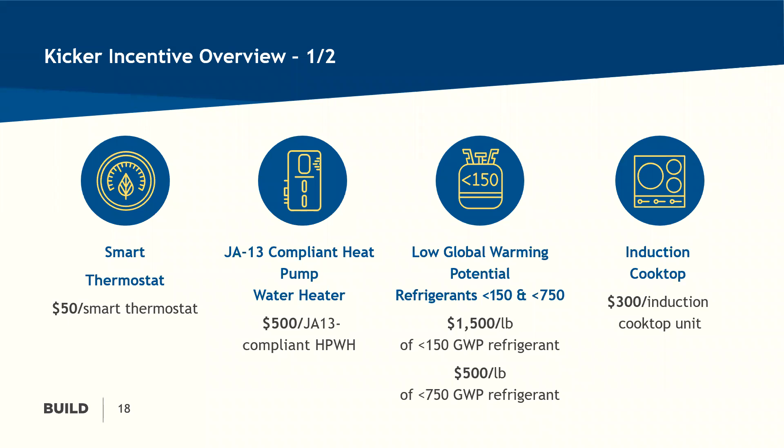Now let's get into why you're all here today, the individual kicker incentives.

Our first kicker incentive is the smart thermostat, which allows residents to control their heating and cooling from their phones, tablets, or other smart devices through Wi-Fi. Smart thermostats help residents save money on their bills and reduce their carbon footprint.

Each additional smart thermostat installed is worth $50 in incentives. If your project installs 100 smart thermostats, that's an extra $5,000. With smart thermostats costing around $125 per unit, that gives you a 40% material cost savings on smart thermostats for the project. There are several benefits to consider when choosing smart thermostats.

Smart thermostats are easy to install. They can be remotely controlled. They can help residents reduce carbon emissions. They can track your energy use, and they connect to all smart devices. Plus, they contribute to grid flexibility.

We require that smart thermostat products be listed on the Energy Star website in order to be eligible for incentives. You can access the directory for more information on the Energy Star website.

All kickers must have documentation proving the equipment was installed in accordance with BUILD requirements. This could include product invoices, the make and model of the equipment installed, and more. We'll review this information at the end of this section.

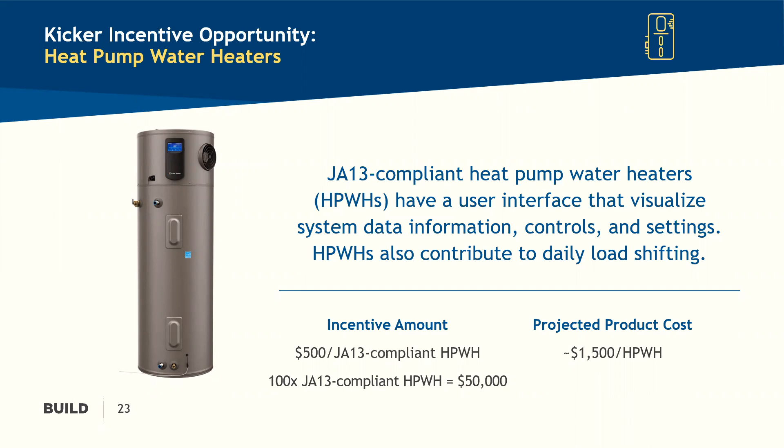Each heat pump water heater installed earns $500 in additional incentives. If your project is installing 100 heat pump water heaters, that's an additional $50,000. With heat pump water heaters ranging around $1,500 per unit, that gives you a 33% savings on heat pump water heaters for the project. How does this benefit you? Let's take a look.

The benefits of heat pump water heaters include reducing carbon emissions, increasing the energy efficiency of the building, and increasing the energy cost savings of the project. They are easy to use and they contribute to grid flexibility during high demand or when power delivery is uncertain.

In order to receive the kicker incentive, the heat pump water heater must be listed as JA13 compliant and meet the qualification requirements. Additionally, all heat pump water heaters coming through the program, including JA13 compliant heat pump water heaters, need to be NEEA Tier 3 or higher to be eligible.

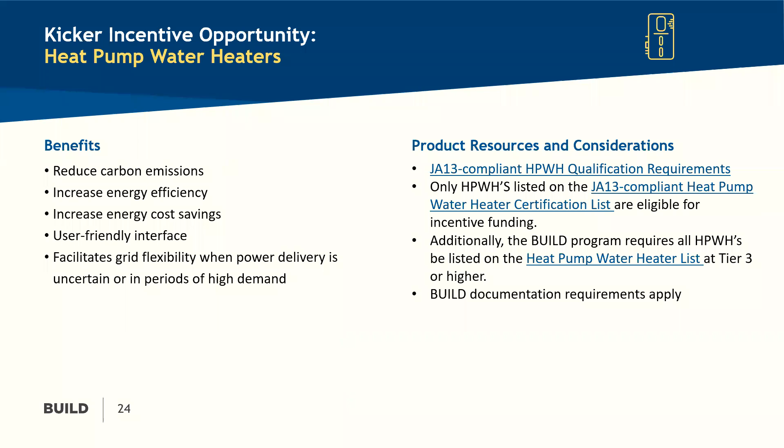Just to sum it up, JA13 heat pump water heater users can visualize system data information and control their settings. Our next kicker incentives are the low GWP refrigerants.

Low global warming potential, or low GWP refrigerants, are liquid refrigerants used in heat pumps to help minimize the effects of global warming. When pursuing incentives for low GWP refrigerants, keep in mind that if you install equipment such as water heaters or heat pumps, space conditioning systems that use refrigerant with a GWP less than 150, you will receive an incentive of $1,500 for every pound of refrigerant.

For refrigerant with GWP above 150, less than 750, you receive an incentive of $500 per pound. What can low GWP refrigerants do for you?

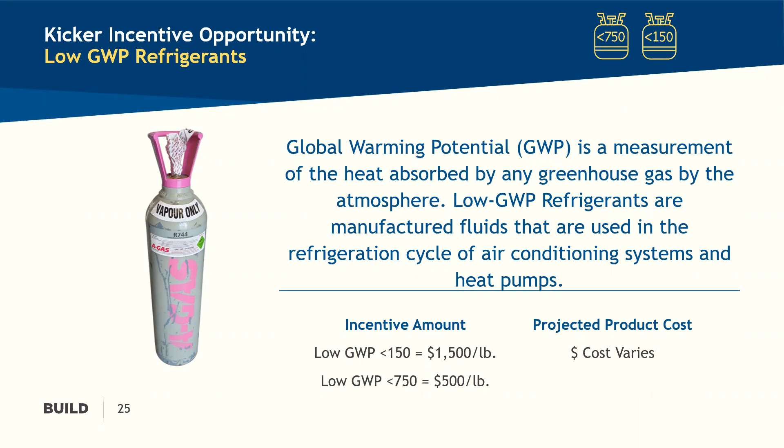The benefits of low GWP refrigerants are clear. They limit the environmental impact of refrigerants being released into the atmosphere at some point in the equipment's life cycle.

Now let's break down how refrigerants differ in terms of their global warming potential. Currently, the most common refrigerants used in multifamily building systems are R410A with a GWP of 2088 and R134A with a GWP of 1430. While you can absolutely use products with these refrigerants in your projects, they are not eligible for this kicker incentive.

There are also alternative refrigerants with substantially lower GWPs, from R32 at 675 all the way down to propane, CO2, and ammonia at or around 0 GWP. Products that use these or other low GWP refrigerants are eligible for this build kicker incentive.

Now let's highlight a few eligible low GWP refrigerants, starting with R32 with a GWP of 675. This refrigerant is starting to be available in heat pump HVAC systems from a number of manufacturers nationwide. R513A, also with a GWP in the 600s, is available in central heat pump water heating systems.

At lower GWPs, and qualifying for the max kicker amount of $1,500 per pound, we have propane as a refrigerant, not as a heating fuel, and ammonia, one of the oldest refrigerants. While there is some equipment with these two refrigerants, they are not yet commonly used in multifamily buildings.

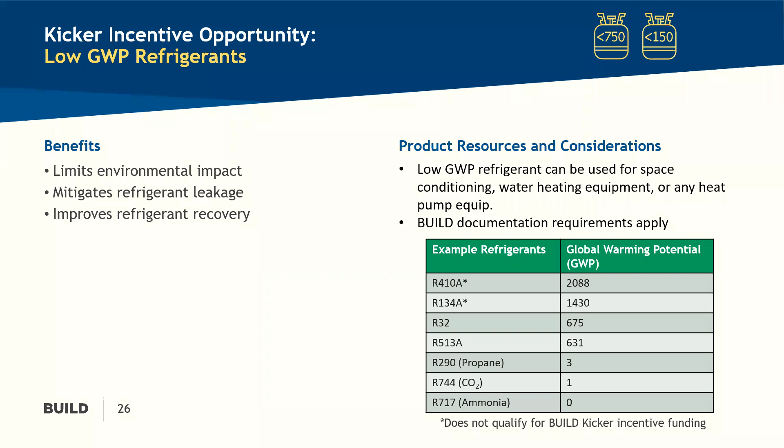But let's explore one of the most commonly used low GWP refrigerants in multifamily buildings, R744 or CO2. There are a number of existing and emerging heat pump water heater systems that use CO2 refrigerant. Such systems would qualify for this $1,500 per pound kicker incentive.

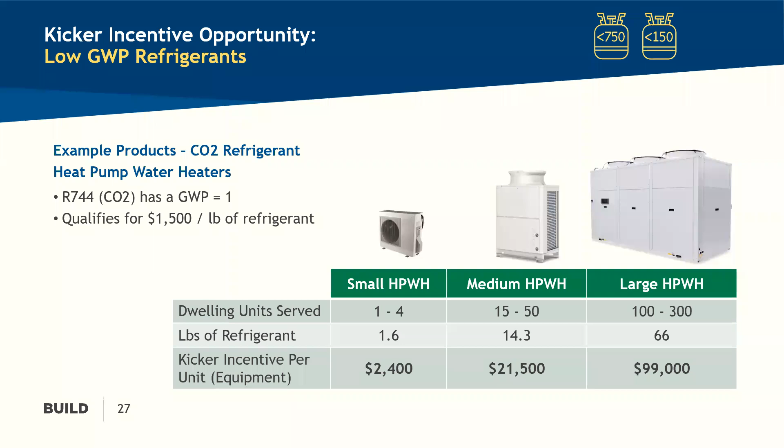Induction cooktops use an electromagnetic field which induces a current in the pan, creating heat to cook the food.

Induction cooktops can bring you $300 per unit in additional incentives. If you install 50 induction cooktops, that is a $15,000 incentive bonus. With induction cooktops ranging around $1,500 per unit, you can save up to 20% by installing them on your project. How does this benefit your project and the residents?

Energy Star states that per unit efficiency of residential induction cooktops is about 5 to 10% more effective than conventional electric resistance units. Induction cooktops emit less heat from the cookware, are faster, have higher temperature control, do not negatively affect indoor air quality, and pose fewer fire and burn risks to the homeowner.

Some compatible cookware includes carbon steel, cast iron, magnetized stainless steel, and granite ware. The bottom of the cooking vessel must be flat and have a magnetic base. Induction cooktops are generally more expensive than standard electric radiant cooktops, but they offer benefits to builders and residents through their high performance. The next appliance eligible for kickers is one that can literally dry the clothes on your back.

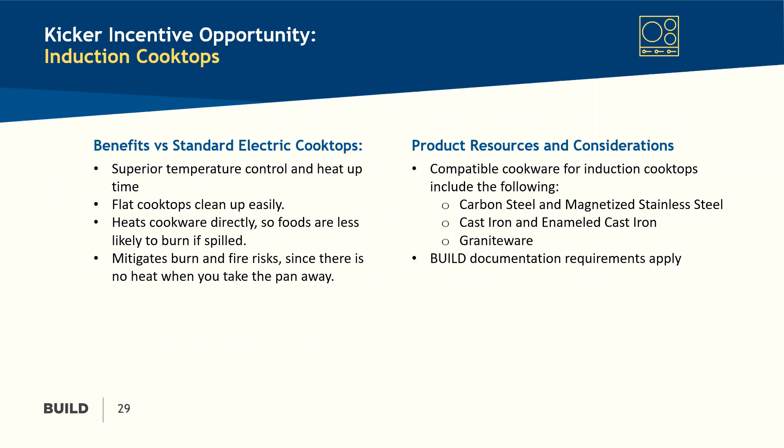I am referring to heat pump clothes dryers, which use a closed loop air stream that does not require exhaust vents. They circulate air through a condenser to absorb moisture from the clothes and then through an evaporator to eliminate it.

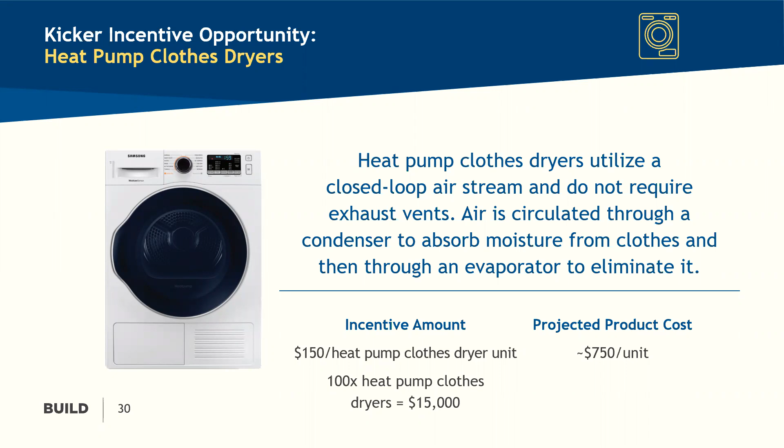They're eligible for $150 in additional incentives, and if installing 100 heat pump clothes dryers, you could receive $15,000 in incentives. Heat pump clothes dryers average around $750 per unit. When taking advantage of this incentive kicker, you can save up to 20% of the equipment cost. There are several benefits to installing this appliance.

Heat pump clothes dryers are easy to install and do not require venting. There are no restrictions on where you can install them within your home. They reduce energy use by at least 28% compared to standard electric dryers, and they are gentle on your clothing using lower heating temperatures. Only Energy Star certified appliances are eligible.

However, there are maintenance requirements to consider, such as emptying the water from the unit between loads. In summary, heat pump clothes dryers utilize a closed loop airstream, do not require exhaust vents, and circulate air through a condenser to absorb moisture from the clothes and then through an evaporator to eliminate it.

Next, let's talk about storage systems. Not to be confused with organizing your closet, where you can now install your heat pump clothes dryer.

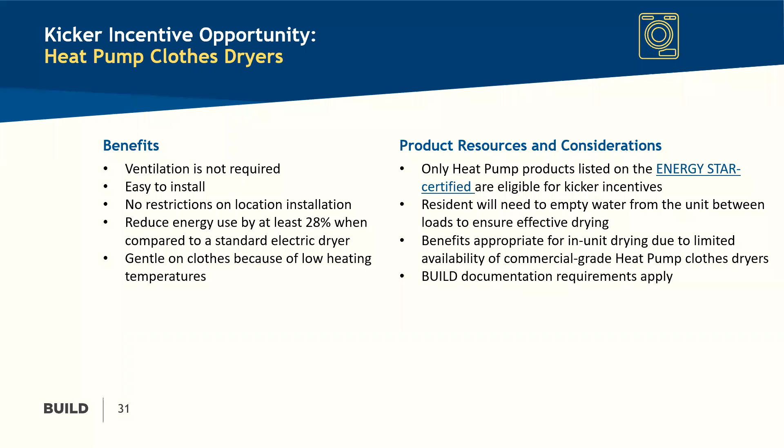I'm talking about on-site energy storage, which is an alternative way for you to supply energy to your projects. On-site energy storage allows you the ability to store your energy supply locally, increasing the level of control and flexibility you have over how your energy is used. Because on-site energy storage doesn't have to rely solely on the power grid, it is often paired with on-site energy generation, such as solar or PV.

The incentives are calculated at $250 per kilowatt hour of storage capacity. So by installing a storage system with a 17.4 kilowatt hour capacity, you are eligible to receive up to $4,350 in incentives. There are several benefits to installing an on-site energy storage system, including saving money.

The storage system can be used as a secondary resource of energy during grid outages. With smaller sizing for easy installation indoors and outdoors, they offer residents control, reliability, and resilience when paired with renewable energy sources such as PV.

They are very cost effective, and when the grid is in high demand, they help reduce costs by avoiding grid energy consumption. Products that meet the eligibility requirements for on-site energy storage must be listed on the CEC Energy Storage System list and meet JA12 compliance requirements.

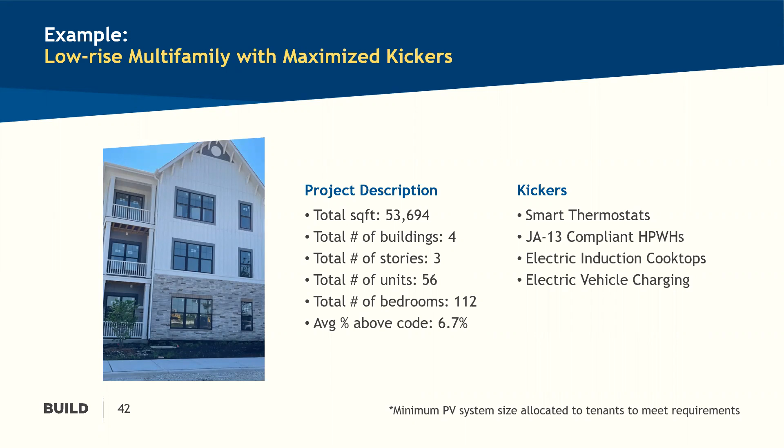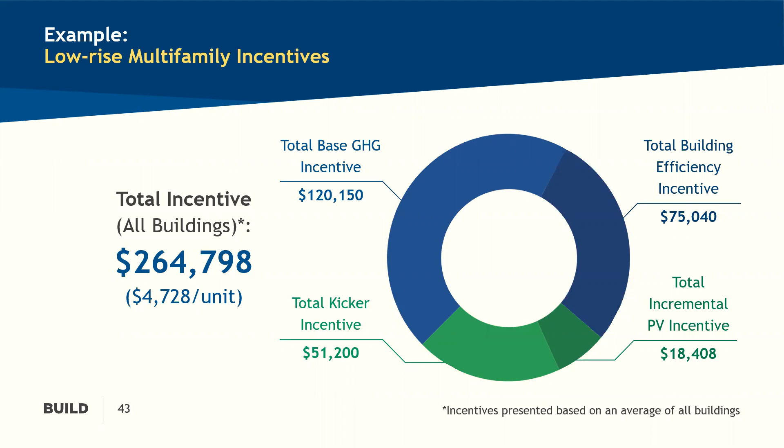If you're looking to get started with the Build program, here are a few tips. To access the Build website, open your browser and type CEC Build Program into the search bar. The first link should take you to the website, where anything related to the program or updates will be accessible.

Build also offers several free services for applicants seeking assistance. To apply for technical assistance, visit the Build website and complete the online application. We provide 300 free hours of assistance to help applicants learn about all-electric building design and technologies, as well as support during all development phases.

The TA team will also assist applicants in completing incentive applications and participating in the program's support network. To apply for technical assistance, please visit the website. Technical assistance is available throughout the entire building design and construction process and is highly recommended for all applicants. Use the Build program website to apply for technical assistance today.